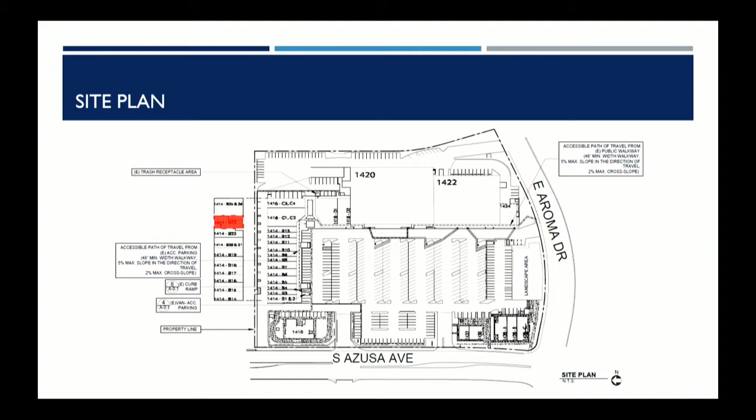This is a picture of the existing site. It's on the second floor, right above Little Paws. This is their site plan, again indicated by the red box. Moving on to their proposed floor plan, their main entrance is indicated by the red arrow. The green indicates their reception room, in blue is their classroom, in pink is their conference room, purple is their break room, and in yellow is their restroom.

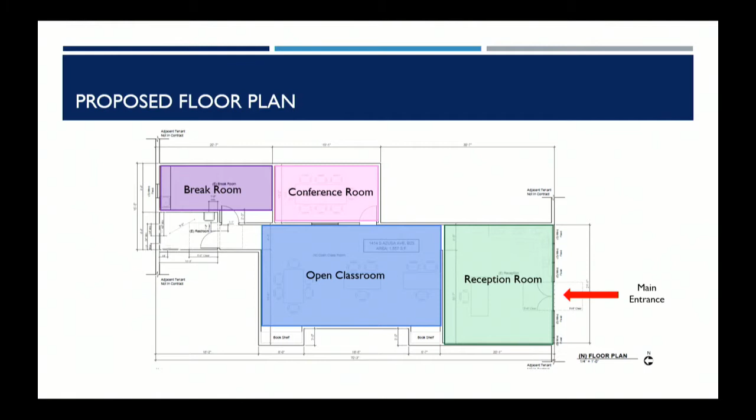Fly Here Academy intends to provide tutoring lessons and language training in English, Chinese, and Spanish. There will be a maximum of 3 employees at any given time, and a maximum of 16 students. Their business hours are Monday through Friday, 1 p.m. to 6 p.m., and Saturday from 10 a.m. to 3:30 p.m. Planning staff recommends adopting Resolution 216073, approving conditional use permit 2102. This concludes the presentation. I'm here for any questions, and I believe the applicant is here as well if you have any questions for them. Thank you.

Yes, we did. So we're going to open this to public hearing, then we're hearing testimony from the applicant, those in favor, then those opposed. Is the applicant here? Okay, come on up.

Good evening, this is Stephen, the applicant for Fly Here Academy. The location is in the commercial plaza next to the Tokyo Central. It's a tutoring center, going to be one-on-one tutoring. That's the case.

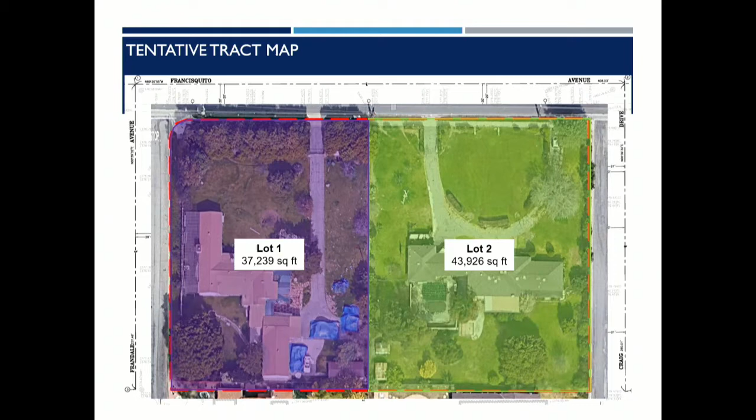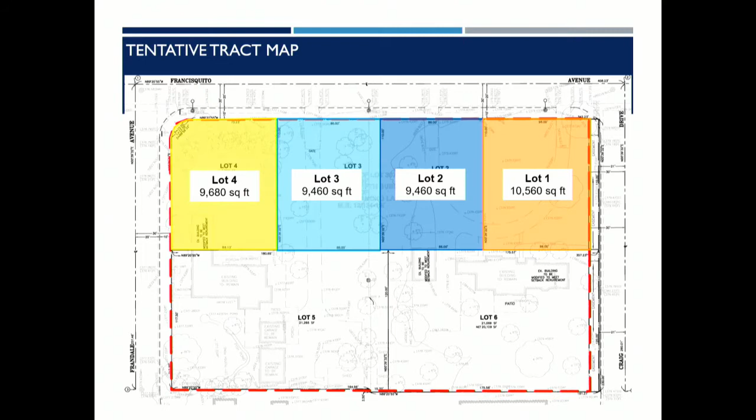For the proposed subdivision, we have lot 1, which is 10,560 square feet. Lot 2, 9,460. Lot 3, the same. Lot 4, 9,680. Lot 5, 21,266 square feet. And lastly, lot 6, 21,069 square feet.

As a clarification for this project, this is only for the subdivision. There is no proposed development for new homes at this time.

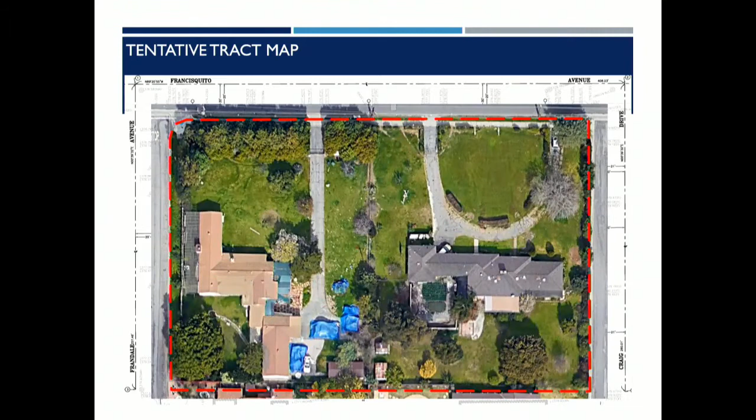Once again, these are the lots, but the main house on the first parcel and the new lot 6, the garage is sticking into the other parcel. So as a condition of approval, it will be demolished and the 2-car garage will be replaced elsewhere on the lot once that happens.

The same for lot 5 — they will have to demolish a section of that home to meet setbacks and not intrude into lot 4. And if they want to expand the current house, they can, but since it's not a garage, it's not necessary to replace that structure.

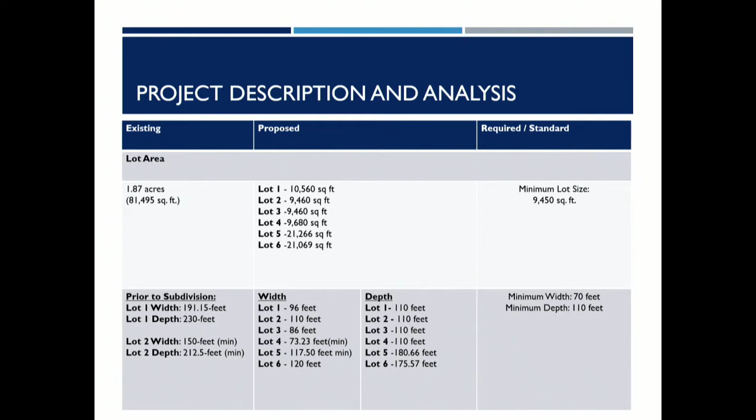So this is just a table indicating all the lots and their new widths and depths. For Area District 2, the minimum lot size is 9,450 square feet, the minimum lot width is 70, and the minimum lot depth is 110. With the proposal for the new lots, all of them will meet that standard.

An initial study and an MND was prepared and circulated for public review. The MND disclosed that the project will not have a significant impact on the environment. It was routed between March 11th, 2021 through April 1st, 2021. The required mitigation measures are for biological resources regarding nesting birds, and for noise.

The mitigation monitoring program is an exhibit, attachment number 2 to the agenda, and provides information on mitigation measures and monitoring by the responsible agencies.

The city received 7 comments during the notice of availability and notice of intent comment period. Responses to those comments are provided in attachment number 3. You should also receive a couple of pages on top of that - those were the original letters, which were shown as blank pages in the attachment that you might have noticed. So what you have now are those original letters for those responses. We also received one comment after the comment period that was therefore not addressed in the response to comments, but was attached as attachment number 4 for the record.

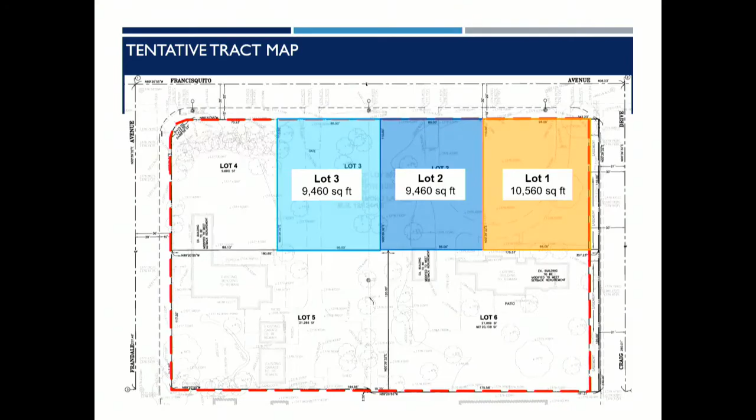Ma'am, can you use the microphone please? Oh sorry, I got all excited. I live on Craig Drive, right behind Lot 6. So we're being impacted, not only me, all the residents in our neighborhood on Craig Drive. That's going to be an impact number one to us, how it's going to affect our residents there and all the others.

And I totally oppose two-story homes there, because that's going to impede into the privacy of where I live, my backyard and my pool. We constantly are in our pool with family - well, not recently because of COVID, but that is also an issue for us.

And just more residents, more traffic - we're going to have more traffic, more cars. Children live in the neighborhood, parents have to be more cautious of watching their children. At this point, but those are my concerns for now.

And yes, we would love to see the visual, we'd love to see what it's going to look like, because right now we have no idea - like you say, it's being chopped up in pieces and we don't even know what it's going to look like. My question also is, since I live behind Lot 6, is there going to be a fence built dividing that lot and my home as well? Are they going to do something about that?

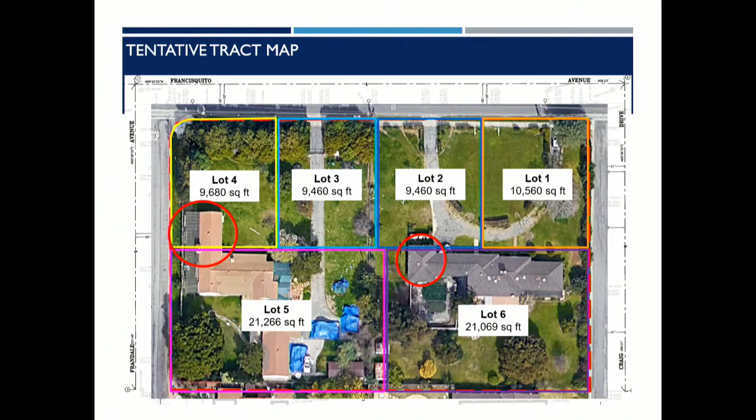And I will amend my motion to reflect Commissioner Lewis's additional comments, and hopefully on page 1 it could be the drawing of the whole house, and then on page 2 it could reflect all those small details that Commissioner Lewis is requesting.

So yes, I will amend my motion to include that. I will second. The next planning commission meeting is April 27th. However, we would need the plans no later than Monday of next week.

Would you like to come up and answer some of the questions that our staff have for you, please? Staff is trying to put this on the next meeting, which is the next Planning Commission meeting. However, you also need to get some of these documents to the staff by certain dates. The next planning commission meeting is April 27th. In order for you to make that April 27th meeting, we would have to have complete plans no later than Monday, the 19th of April.

So that's next week. If you can't make that date, then we just have to move it to another date. The following planning commission meeting after the 27th is May 11th. So I think I would like the May 11th, so this way we'll give my designer and architect a little more time to work on it and meet some of the site plan details. So it would be better to meet again on May 11th.

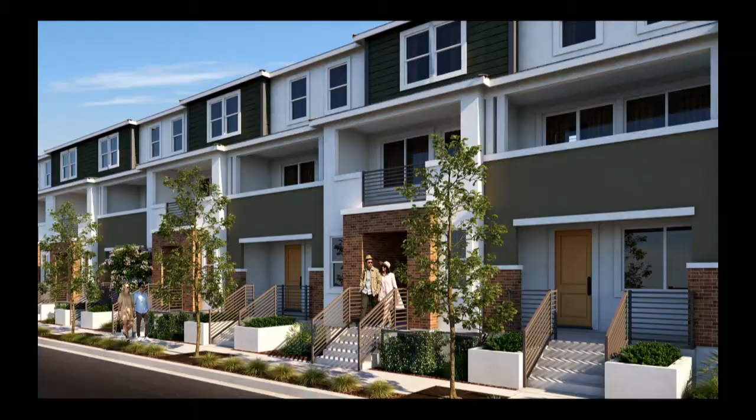I just want to reiterate, we're really happy to be in the city of West Covina. Joanne, if we could just pull this up. Okay, perfect. So I wanted to quickly run through some of the renderings we put together for the West Cameron project. I have a site plan at the end of this PowerPoint, but this project is 84 three-story townhomes located directly adjacent to the Cameron 56 project.

Here's an image of these townhomes from West Cameron, showing what those stoops would look like, how the landscaping is working. As you can see, the stoops, we needed to eliminate that maximum width requirement for the stoops in order to provide full length stoops here, as shown in the illustration. Could we go to the next slide?

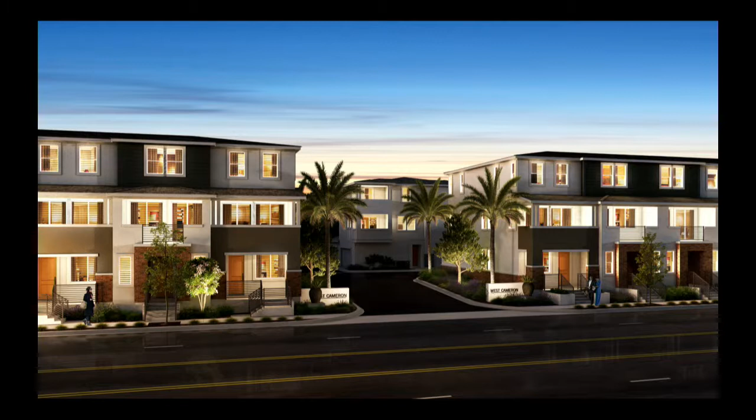And here's an evening shot of the entrance of the West Cameron project. Again, you can see the stoops with the landscaping proposed.

We're really excited about this project. It's similar in terms of the architecture, 3-story townhomes, similar to the Cameron 56, but also adjusted specific for this site. It's not the same architecture, it's not the same product. It's altered specific for this community, and we're really excited about it. Next slide.

So in terms of the request to reduce the width of the townhomes from 18 feet to 16 feet, what we developed is a very popular townhome product that we're planning throughout communities all over Southern California. It's an interlocking townhome, a tandem unit directly next to a side-by-side garage. This reduces the width, creates efficiencies in density, and also provides more storage for the tandem unit, which was key. If you're going to buy a unit like that, you want enough storage.

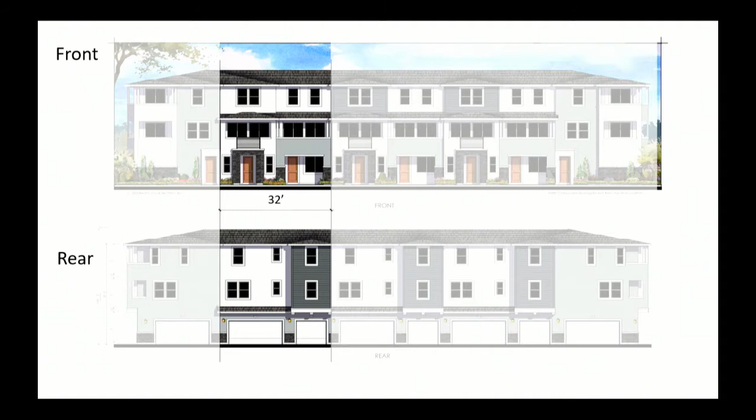So for the upper floor decks, I wanted to read an excerpt from the downtown plan. It states: the primary building sits at the front of the property, with the garage at the rear, separated from the primary building by a rear yard.

So for this definition as written in the downtown plan, that's typically found in older, lower density townhome communities. In my opinion it's a bit of an outdated model, and builders today aren't building that way. We're trying to be as efficient with the space as possible. Also, residents don't want to walk from the garage to the actual home when it's raining. It makes a lot more sense to have that space connected within the actual building.

The request for the private open space is to make sure we can split it between the ground floor and the upper floors. As written, it's really more intended for the ground floor, and they were expecting an 8 by 8 foot square basically. So what we would like to do is split that open space up.

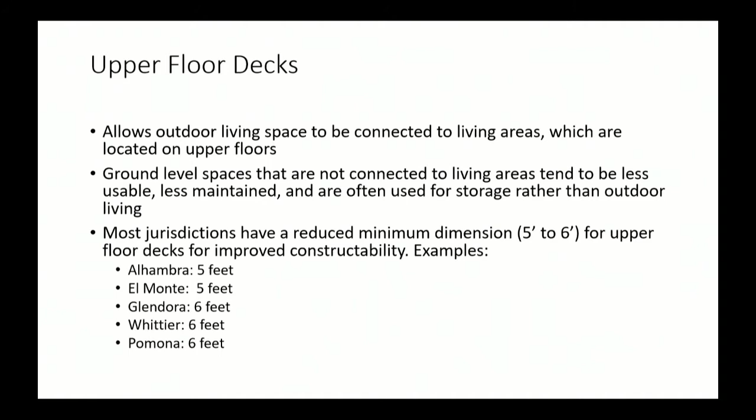This shows you, in terms of Chair Hang's question about the request from 8 feet to 6 feet, it's a constructability problem we have. If this open space is on the second story, every foot matters in terms of cantilevering that balcony out. If we can provide a 6-foot minimum dimension, we're actually able to provide more open space both on the ground floor and upper floor to exceed that 100 square foot amount.

As an aside, the project we built in Cameron 56 sold out and is extremely successful. It also provided minimum balcony space under the current 8-foot minimum.

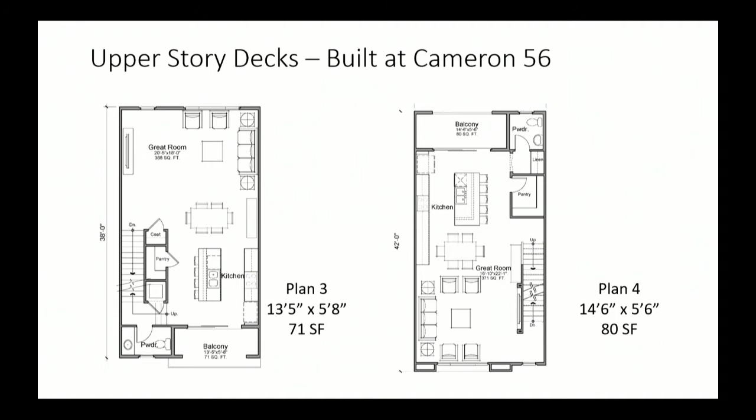I have a question. I do have a concern that the city had gone through the time of having community meetings, which allowed for the general plan and different changes to encourage more affordable housing. I'm a little concerned that it appears what you're asking us to do is craft something that perhaps meets your company's desires and needs. With your Cameron 56 project, did you have to apply for a specific plan in order to lay it out the way you have constructed it? No, with that project, we did not have to.

The downtown plan was newly formed, so we were consistent with the downtown plan at that point. For that, you're providing at least 100 square feet of usable yard area, but it wasn't cumulative. It was cumulative. And so how did you provide that at the 56? As far as I'm aware, it was an interpretation with the code, with the previous planning director, and that was an exception that they provided for that project specifically, and that's how they were able to get around having the lower minimum dimension.

And so for the code amendments that you're asking for, it's for a future project, but again, the concern I have is that the city did have input from the community, and what we want and what we're looking for is quality. We understand that there are certain constraints when it comes to building and laying out items, but also, West Covina is different from the other cities that you listed that had the much smaller private yard area. Absolutely, yep. And we're looking for quality.

Question: where would the children have an area for outdoor within your development? It's all in the private open space.

So for the interlocking unit, the townhome, and the side by side, as you can see on the tandem unit, we have a little bit of a smaller porch, but we have more of that open space, that private open space on the balcony on the second story where all the living is happening. So while someone's cooking dinner, you can watch your kids that are actually playing on the balcony, as opposed to outside or closer to the street. It's all contained within the townhome unit.

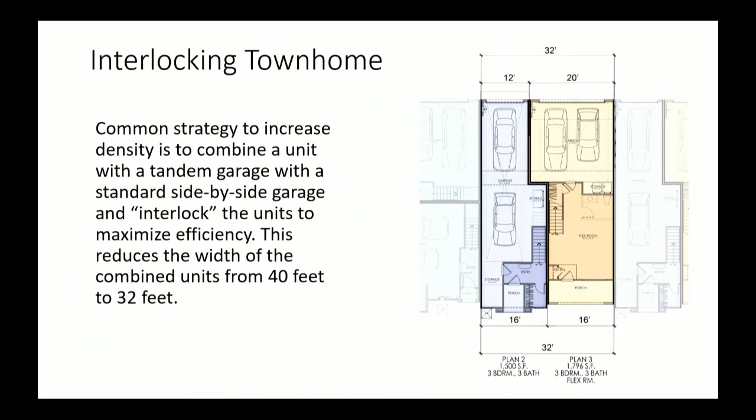So you guys aren't actually providing a playground area down on the main floor ground? Specific for the units that face West Cameron, there's no... So there actually isn't any common area? There is common open space within the community, and I'm happy to pull up the site plan. But I'm just talking specific for the actual floor plan, that the private open space is the balcony for the second story, the upper levels where you're living.

Do you have a slide for that? I do, yeah, it's the last page.

So throughout the paseos within the townhomes, we have some green space, and then also in the corners we have reserved the lower left corners, with doggy bag station, benches, that kind of thing to provide some greenery and a place for kids to play.

Okay, I guess where I'm wondering, how large are the corner areas that you're providing for the common space? I'd have to confirm, I'd have to get back with you on that one. I don't want to make sure I get you the right number, but I can get that number for you.

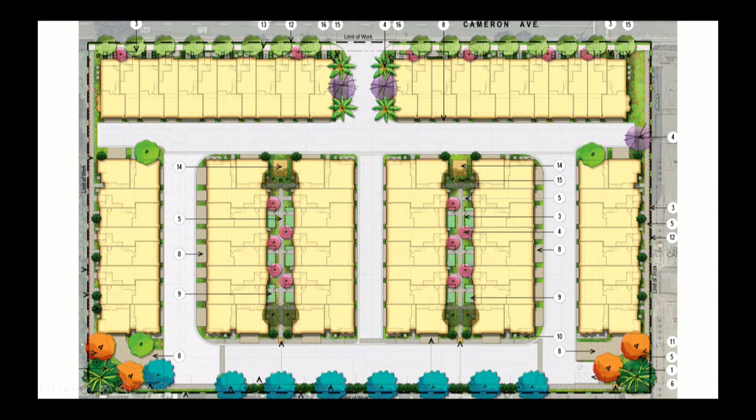I have a question. So just to clarify, this proposal is to amend the code, but this is for a specific project, right? It's really only to amend the code for the downtown plan across the board, it just so happens that we're the first project applying after the downtown plan would be amended.

So was this presentation made public before this meeting, or is this the first time everyone's seen this? City staff, this is the first time. Okay, actually if I could just amend that, we did present in October of last year, and that was a public hearing where we presented to the Planning Commission. They voted unanimously to initiate the proceedings, and the public was allowed to speak at that hearing as well. So this is the second time, but to clarify, this exact presentation was not made at that Planning Commission meeting. It was more of a verbal presentation.

Okay, so my only concern will be that, again, I'm a big supporter of development, especially our city meeting the regional housing planning and so forth. But I would have loved to see this detailed information in advance before today's meeting. This is just an idea, but do you think it's possible that if we were to postpone this to our next meeting? I guess city staff already has it, but would this be something the Planning Commission can receive before the meeting? I mean, for their project - I know it's not going to be detailed because it involves investment in money, but just like the other matter, I think it's important that we see these drawings before we're voting on something.

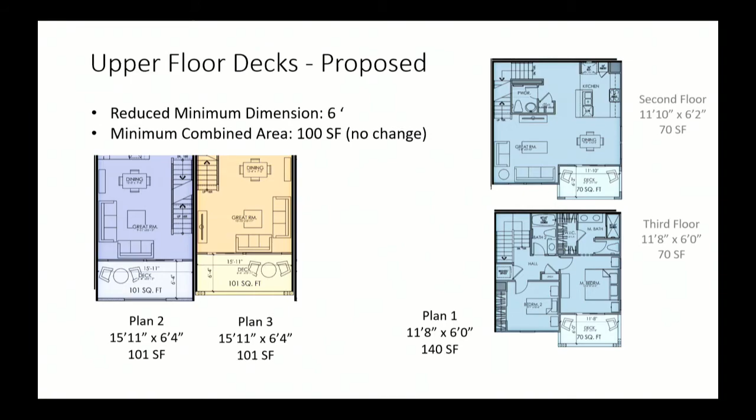That deck area, if you look at it, the purple house has 101 square foot in front of it. The yellow one also has 101 square foot in front of it. That's Plan 2. Plan 3, Plan 1 - I take it Plan 1 is the one with tandem parking, that's a little bit smaller square footage. Plan 1 is what we call the end units, they're a little bit more compact.

But what you see here is the second and third floor plan. Each provides the minimum 6 foot depth, but they're about 70 square feet. So amongst the building, we're providing 140 square feet of private open space. So we're exceeding the private open space requirement, but it's spread out amongst 2 different levels, so you can enjoy coffee across from your bedroom on the 3rd floor, and your kids can enjoy the 2nd story private open space as well.

So you're also planning to have open space on the 2nd floor, which is the kitchen living area, and then the master bedroom - I assume you have a little open space on the 3rd floor. Exactly, where you could have another chair and have coffee outside.

Okay, so we're just asking to split that space up into multiple floors. I think the reason why we're asking for this amendment is it's a pretty common practice amongst home builders to provide open space on multiple levels. We'd like to make sure it's written in the code, we've been working with staff, so that when another developer comes in with a different project in the downtown plan, they have these requirements already outlined. That's why I'm here today.

It's actually nicely thought out in a way that if I have a little pet, I like to have them go exactly do their thing. Okay, thank you. Thank you for explaining all that.

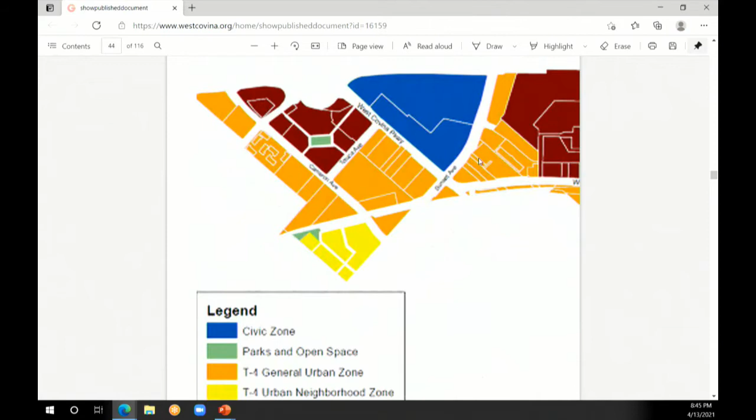I just wanted to go through it line by line. So this particular section regarding the plate heights impacts all areas in the T4 general urban zone. I'll go ahead and show a map of the specific plan area. So all the areas in orange in the downtown plan are in the T4 general urban zone, so the plate height impacts all these areas, basically differentiating the plate height for commercial and residential.

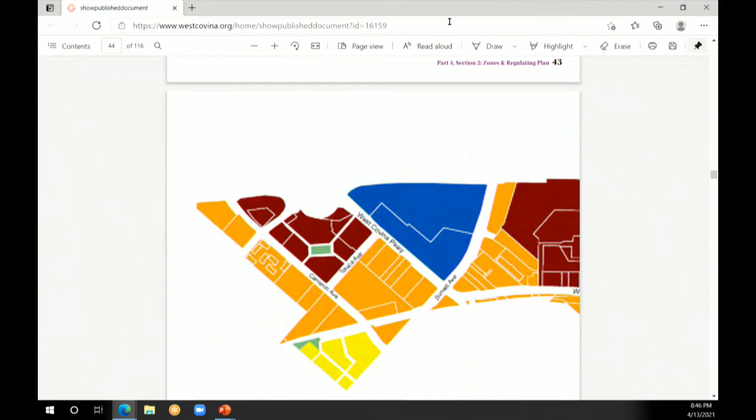For this row house, the amendment pertaining to the row house, private open space, and the width of each row house units - that section would only apply to areas within the downtown plan. There are many different building types that can be constructed.

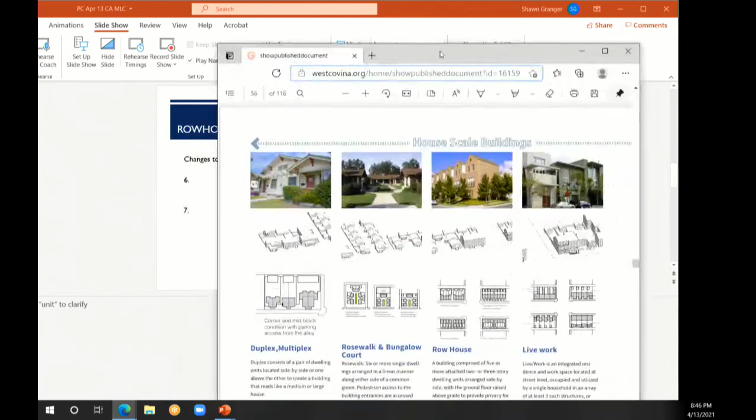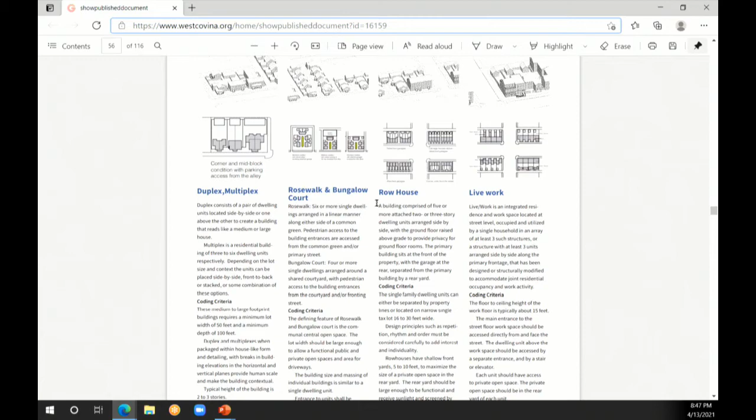For example, I have the downtown plan here. So in different parts of the downtown plan, there are different building types such as duplexes, Rosewalk, bungalow court, row houses, live work, court, hybrid, linear, and flex building.

For example, in the row house section, the row house can only be constructed in the T4 general urban and T4 urban neighborhood zone, I believe. That particular open space, building size, and massing being proposed would only apply to those who wish to construct a row house building in these two zones, the T4 general urban and T4 urban neighborhood.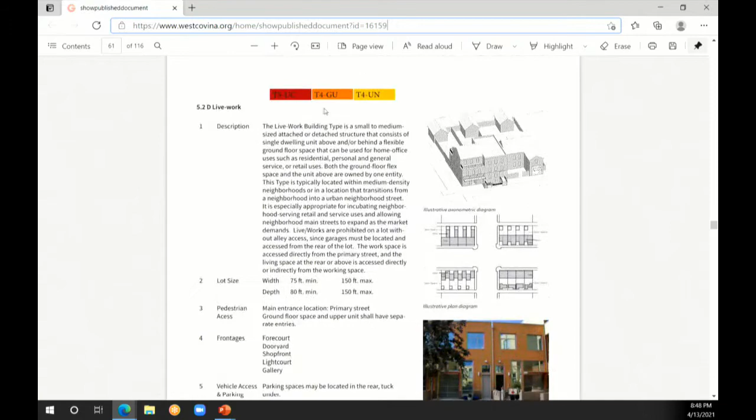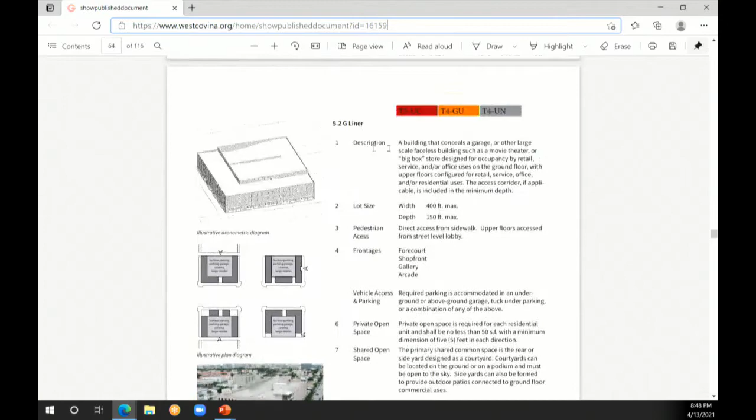And amongst these two zones, there are other types of buildings that other developers or property owners can also construct, such as live work, which can be constructed in the T4 general urban zone as well, the court style, the hybrid court, the liner, the flex building type, and so forth.

So basically, it's very specific. It would only apply to those in the T4 general urban zone, in the T4 urban neighborhood zone, that wishes to construct a row house type building.

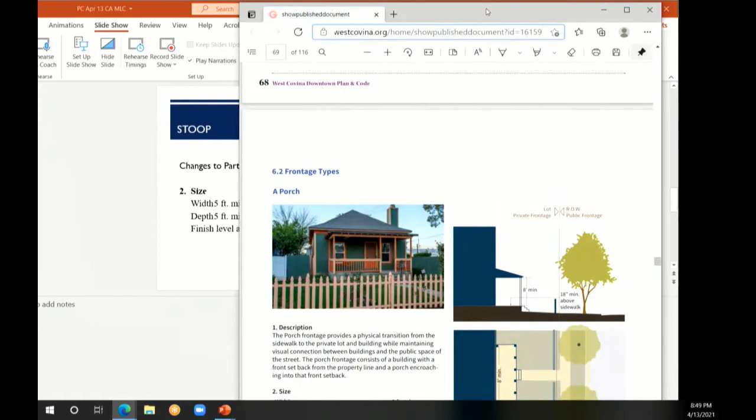And for the stoop, there are many different types of frontages allowed in the downtown plan, such as porches, dooryards, stoops, and forecourt. So the change in the stoop section only applies to those who wish to construct a plan that involves a stoop.

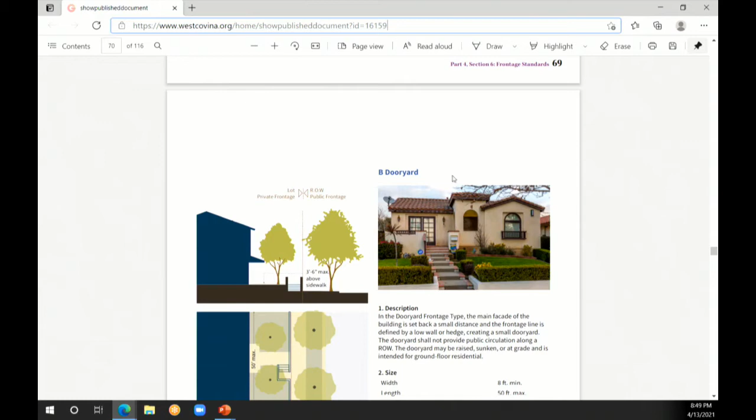If somebody else wants to construct a row house type development or a live work type development that utilizes a porch type frontage, then that stoop section would not apply to them. So the downtown plan area and code is flexible in that way, since there are different building types that can be constructed at each zone.

And just to clarify, we're only amending the code to allow a developer to start the process. So tonight we're not recommending anything about how a house is going to look like, right? Any developer who wishes to construct this type of development within these very specific standards - when that time comes that a developer wants to build, the Planning Commission will have a say on how something's designed or how it looks, right? That's correct. Great, thank you.

Okay, so let's go back in terms of what it is that we are recommending to our city council. Joanne, can you pull out that sheet again regarding the commercials and the residentials? This is what we're recommending to our city council tonight. Can you put it on the screen too? Are you talking about this slide? Yes, that one, and there's only a few items. Okay, so let me go ahead and do the presentation from the beginning.

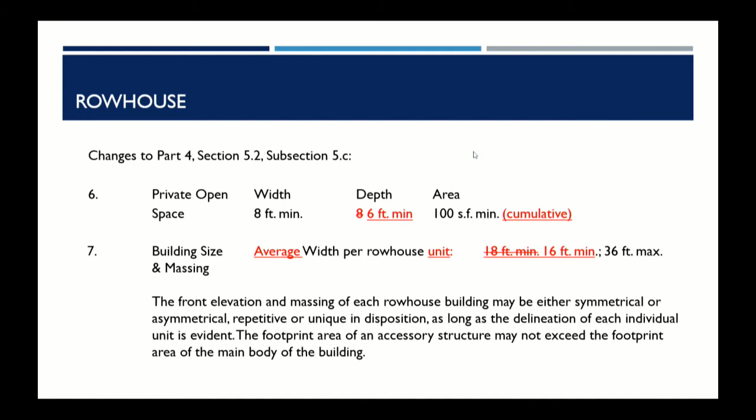Sorry, I'm trying to eliminate the maximum, so there's no maximum. Yes, they don't want the maximum. They want to make it bigger if they can. So in certain areas they want to make it a little shorter, in certain areas they want to be able to make it a little bit bigger. So I think that's a reasonable request.

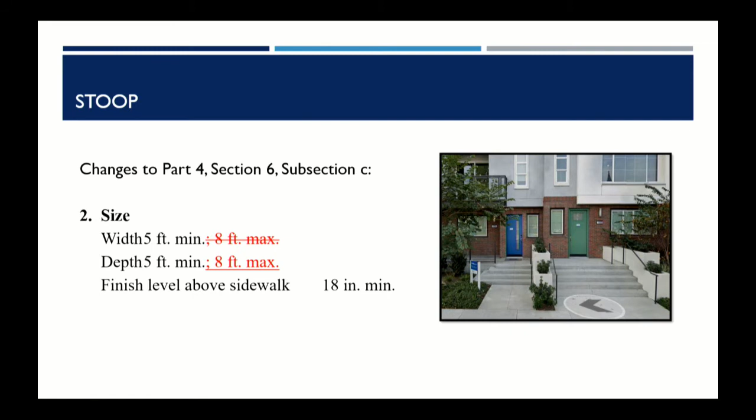I think it's important to note, for the residents watching at home, the picture you see on the screen right now is just an example and not how it's going to look. It could look way more beautiful, it could look way different, but that hasn't been brought to us yet. All we're approving tonight is certain small changes to allow a different type of development to occur.

Okay, so we are... does anyone have any comments to add?

Plenty of comments. Okay, so first and foremost, I just don't understand changing the height differential down to 10 feet. We're talking about an urban area. In an urban context, if you look at downtown LA and the lofts and everything there, they're all 14 feet easily, minimum. So I just don't see any reason why we would want to change this.

Now, if somebody wants to come back to us with a specific plan and present that to us, I'm all ears. I take them as they come. But from my perspective, I don't really see the efficacy in this. This is going to lead to a lack of uniformity of development in the urban zone.

With regard to the second section, quite frankly, if you want to take out the words 'located within medium density neighborhoods,' fine with me. I have no objection to that.

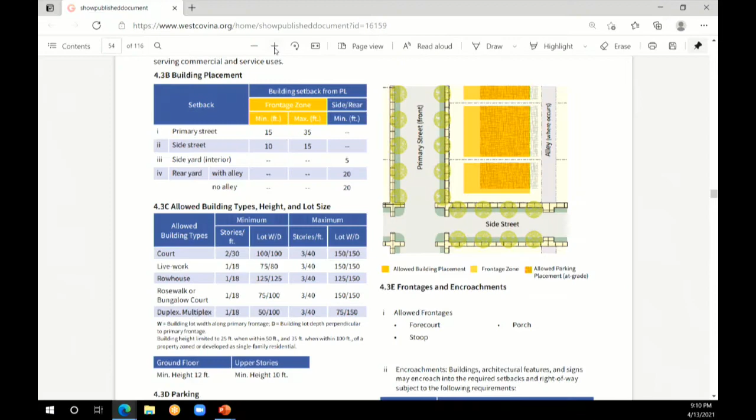For the T4 urban zone, it depends on the type of row house being proposed. So they might know the answer since they're asking for this. If you're looking at the computer right now, I don't know if you can see it clearly, I'll enlarge it. So for a row house building, the maximum height for a 3-story is 40 feet. I'm sorry, it's not an issue. Even if you had 12 feet, you would still have an additional 4 feet at 3 stories, so that's why I don't think it makes a lot of sense.

And it also depends on how far the distance is between the residential. The building height is 25 feet when you're 50 feet away from residential, and 35 feet when you're 100 feet away from residential. But if you're more than 100 feet away from residential, it'll be 40. So it just depends.

So to some extent, according to Commissioner Lewis, it seems like it's not making a difference, making these changes, if we were to make the changes. Well, no, I think it is making a difference. And if we make these changes for the developer, I'm sorry, I misspoke. For example, this doesn't even have to be related to a row house, this could be any sort of development.

So if, for example, down the line, there was a situation where there needed to be a conversion of certain buildings that are shells - I think that was the word you were looking for earlier - a building shell going from hypothetically residential to commercial. Effectively, you're kind of pigeonholing people into that lower level. So let's just say our downtown becomes more business intense for whatever reason, and down the line we want to allow the redevelopment of that building from a residential standard to a commercial standard.